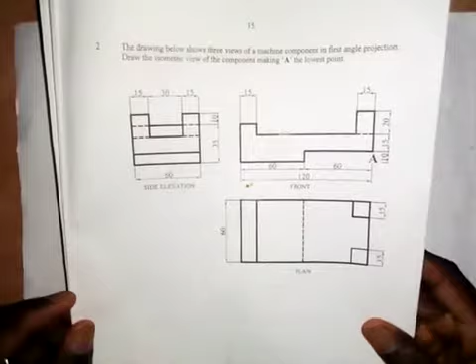Now I want to start with this. These are the orthographic views that I want to start with. This is the front elevation, this is the plan, and this is the end elevation. We are asked to use instruments to draw this - this is a NECO question, an examination question.

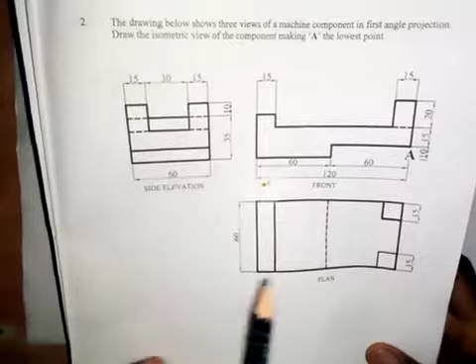But what I want to do is sketch the isometric view freehand. Now when we are sketching, we need to be conscious of the dimensions of the given views, or dimensions on the given views.

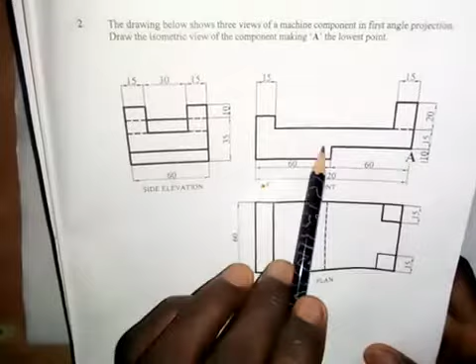What I mean is that if you look at the distance from here to here, this is 60 millimeters, and the distance from here to here is also 60 millimeters. It means the total is 120.

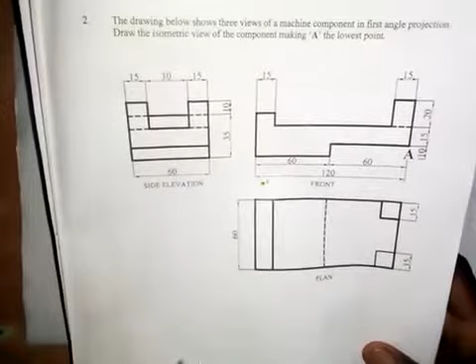You need to make sure you draw proportional to the dimensions given. Since this is 120 millimeters, I must try as much as possible to obtain that 120 millimeters. Even if it ends up less, it shouldn't be glaring - just a little off - and if it's more, it shouldn't be too much.

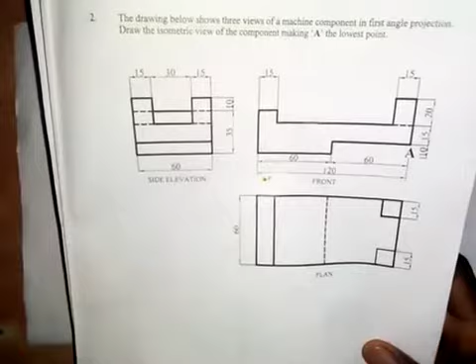Since this is 120, you should not draw something where the total length doesn't match - just drawing something small. That is not correct, that is not good, you'll be penalized for that. So you need to try as much as possible to sketch the object proportional to the given dimensions.

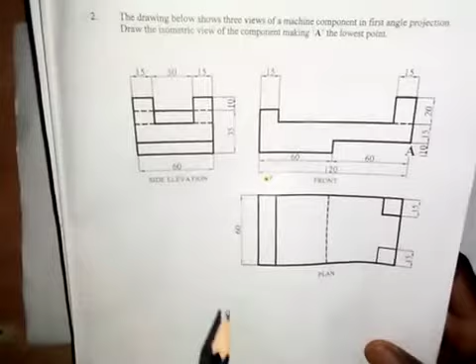You are not using a ruler, I know that, but as a technical drawing student you should be able to look at a line and say, okay, this line should be of this length.

This is going to be the first video on this topic, so I will still do more. Let's start and see.

So this is the front elevation, and this is the plan. This is the end elevation, and we have the lowest point here - very important, you need to pay attention to this point, the lowest point, very important.

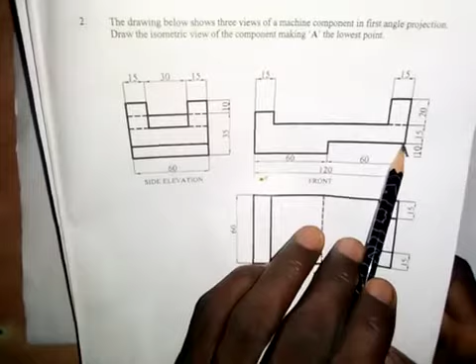Let's start. The first thing you need to do is sketch a horizontal line like this, then produce a line in this direction, and also a line in this other direction. Since we are sketching an isometric object, you need to draw these lines at an angle of 30 degrees each, as you would when using drawing instruments.

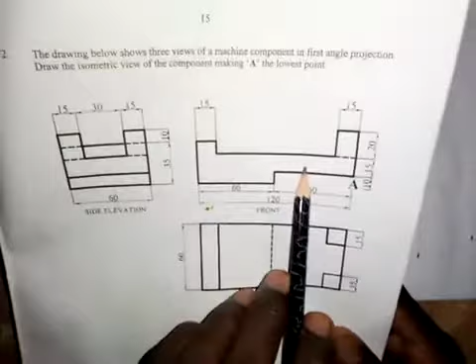What I want to do first is sketch out the shape of the front elevation. By the time I'm able to get that, the other things will come out with ease.

So I'm going to produce a vertical line here like this. This shape that we have here, I want to bring it out. The vertical line I just drew is this line, and this is the other line.

Now I will take this side a bit and bring it down, taking it to this side. Then I have something here like this.

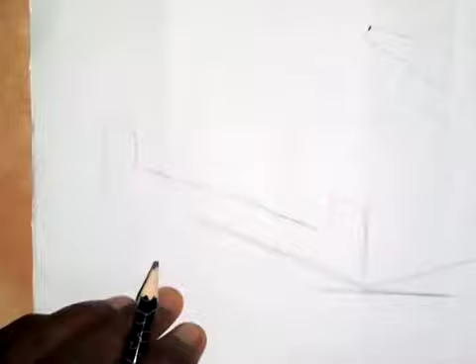So I need to rub this off a bit. You need your eraser, and these lines that you are drawing should not be thick lines, they should be faint lines.

Okay, then I take this to this side like this. So for this line, it goes in this direction. So if you look at what I have here, I've produced the shape of the front elevation. That's the shape that we have here. So now we move on to complete the work.

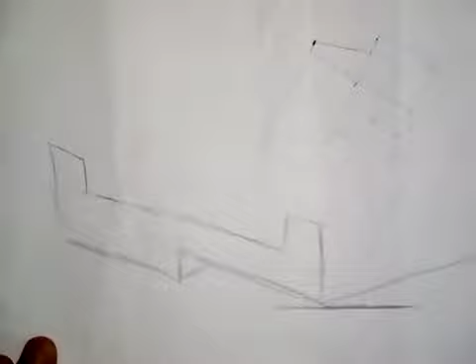So looking at what I have here, if you look at the plan, I have a square here, I have a square here. So this square that I have here, though the whole of this is a rectangle, it's a rectangle. So but I have a square here.

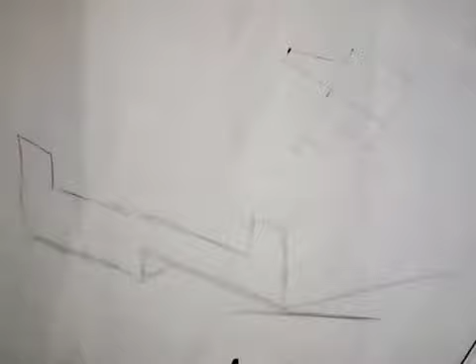So this square that we have here, it stands for this shape that I've produced here. So we also have something like this. We have it on this side too, and here we have a rectangle. This is going to give us a rectangle when we produce it.

Okay, so if you look at the plan, we have this as a short dashed line at this point. It means when we are looking at it from the top, we are not going to see this corner here. And that's what I've produced here.

So let's see the remaining part of this. What I'm going to do here now is produce the square that we see there. It's going to take time, so it's not something that you can rush. If you make a mistake, please, you need to rub it off.

And when you are drawing, make sure the lines are parallel to each other. I'm trying as much as possible to make sure that this line is parallel to this line, and this line is parallel to this line. If it is not parallel, please rub it off and resketch it. So that's what I'm doing here now.

Okay, so it's something that takes time, but with practice we are going to get it. Okay, so we need to produce a vertical line here. I'm trying as much as possible to make use of the given dimensions.

And you don't have to think that you can be perfect at it at once. You can see me also, I'm also trying my best. I'm not saying I'm truly a professional at this, but I'm trying my best to make sure.

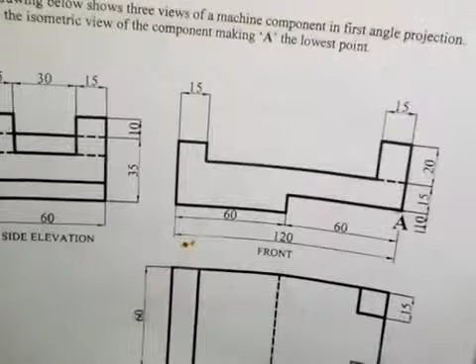So now the next thing I'm going to do is produce this rectangle. We have this rectangle along this part, and this is what we have here. So what I need to do now is take this line to this side. The line is not okay, maybe the way I turned the paper I didn't really see it well, so I'll be taking it to this side like this.

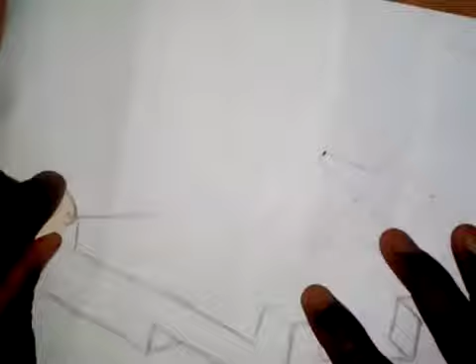So I want to make sure this line is parallel to this line. I think this is too high, because what we have here is shorter than what we have on this part, so I'll just reduce it like this. So I believe you can see that.

Then I will take it to this side, and then I will also take this to this side. So be watching the space, make sure that the space is equal.

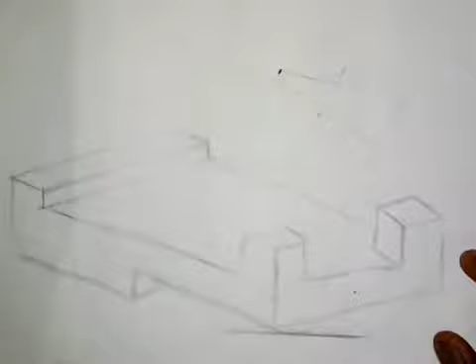So it's not something that... looking at what I'm doing here, I think the shape is coming out little by little. Looking at this, I think this should be enough as 60 millimeters. Then I'll bring this down, then I'll take this side like this. Okay, so looking at this, the shape has come out.

I want to make it more darker. I see what I did here, I didn't use a ruler to take the measurement. But looking at this thing, looking at the object, looking at what I've sketched, so I tried.

So this line, we need to rub it off. You don't have to rush it. It takes time, but we are able to bring out the object.

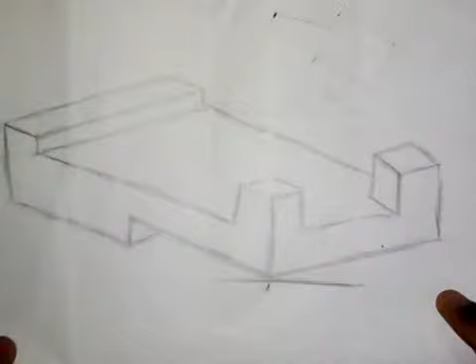Okay, so looking at this, this is what we have here. This is the object that we asked to produce, and this is point A as we are given in the given view. So looking at what we have here, these are the given views.

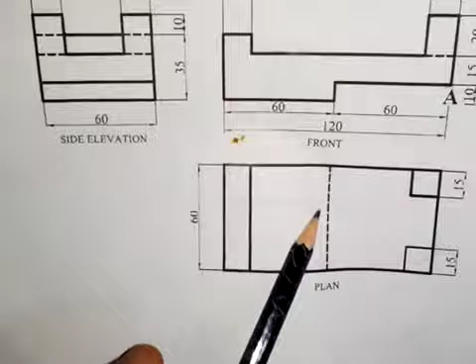So this is the front elevation, which is the shape that we have obtained here, and this is the plan. So in the plan we have this square, these are the squares that we have here, and then we have this rectangle here. So this is it, this hidden part is what we have here. So this is the isometric view of the object.